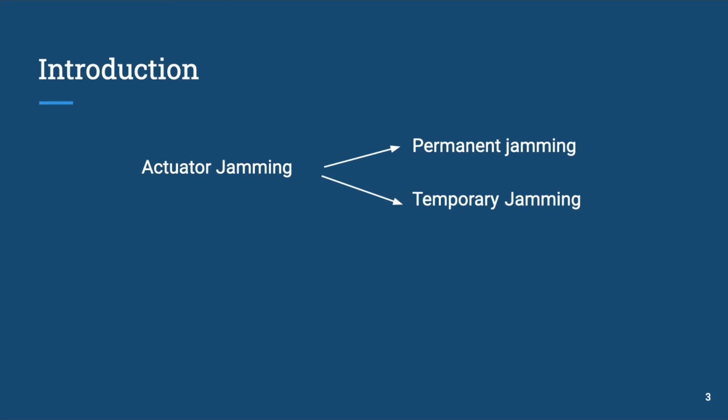In this presentation, we will be focusing on addressing aircraft actuator jamming. Actuator jamming is attributed to permanent jamming and temporary jamming, in which the fault phenomena could be very similar. Hence, a conventional fault detection module cannot discriminate between them. Therefore, we propose a reconfigurable model predictive controller with an active fault detection module to address this issue.

Have you ever wondered what is responsible for changing the pitch of airplanes? Elevators are surfaces of flight control, typically at the rear of an aircraft, used to control the pitch of the plane, the angle of attack, and the wing lift. The pitch of an aircraft is controlled by adjusting the angle, and therefore the lift force, of the elevator.

Lots of work have been done in the past to control the pitch of an aircraft for the purpose of flight stability. And yet this research still remains an open issue in present and future works.

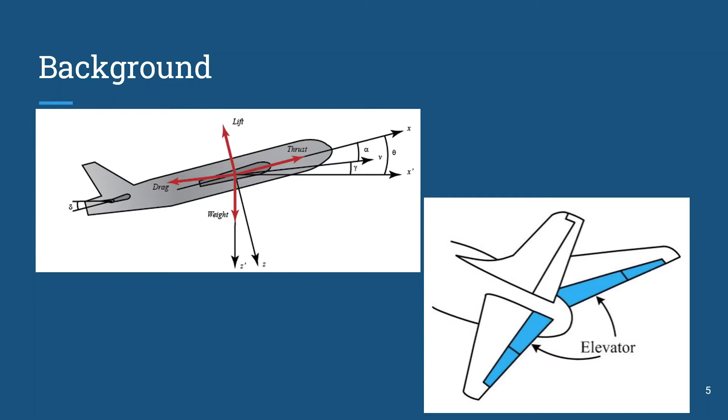So what is our motivation? In the past two decades, about 59% of fatal airliner aircraft accidents were caused by loss of control in flight. The malfunction or jam of aircraft control surfaces such as elevators is very dangerous because it results in a reduction of control authority and imposes persistent disturbances on the aircraft. The most critical actuation device is the longitudinal aircraft control, and its failures will result in a catastrophic aircraft crash.

In this presentation, we focus on the longitudinal control of an Airbus passenger aircraft in the presence of elevator jamming faults. We propose the use of Model Predictive Control, also known as MPC, as a fault-tolerant controller to actively help the fault detection unit discriminate between permanent and temporary jamming faults while ensuring the performance of the aircraft.

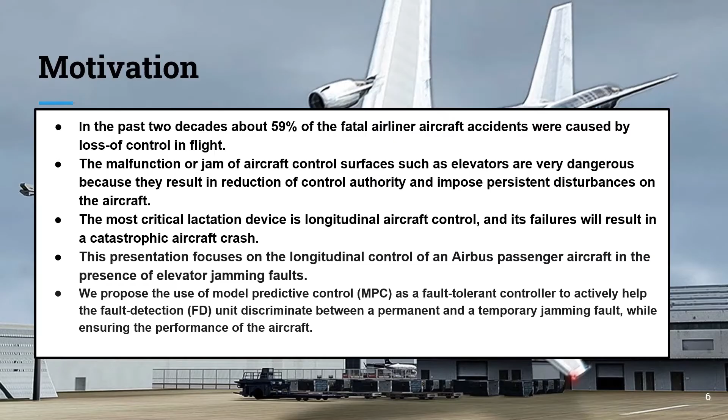Alright, let's dive into the more technical part of this presentation. I'll start off by explaining the mathematical representation of the aircraft longitudinal model.

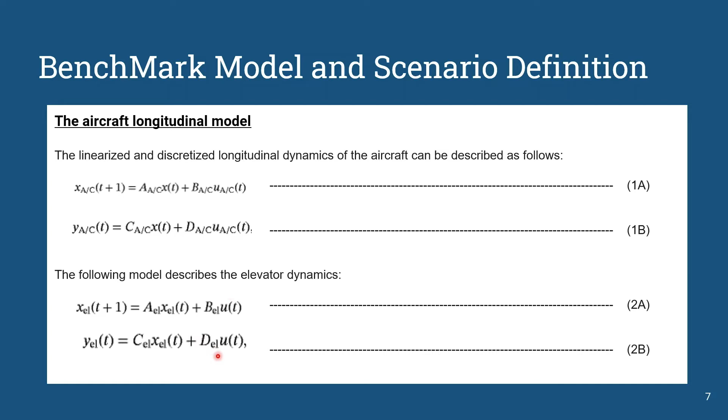This second equation stands for the discretized longitudinal dynamics of the aircraft, where y stands for the output and u is also the control input. As you can see, these other two equations basically mimic the first two.

Fault description: when elevators get jammed, one or more of them remains fixed at an unpredictable value. This might differ from their normal saturation limits. Elevator jamming can be attributed to two different root causes. The first one is known as the stuck fault, also known as permanent jamming.

Once the elevator gets stuck in a certain position, it remains in this position and cannot be recovered. From the graph, you can see this is where the jamming happened, this is where the fault started, and although this command was run, nothing happened. The elevator is still stuck in this position.

The second type of jamming is called the stall load, which is basically a temporary type of jamming. We can see that here the stall load started, and after this command is run, the elevator position is stuck for a certain time, and we reach the end of the stall load where it gets recovered.

Because of the similarities in these two jamming types, it's hard to predict if it's a stuck fault or a stall load. Hence, we propose our integrated fault-tolerant approach that actively modifies the control strategies to help the fault detector module discriminate between the two causes of the jamming.

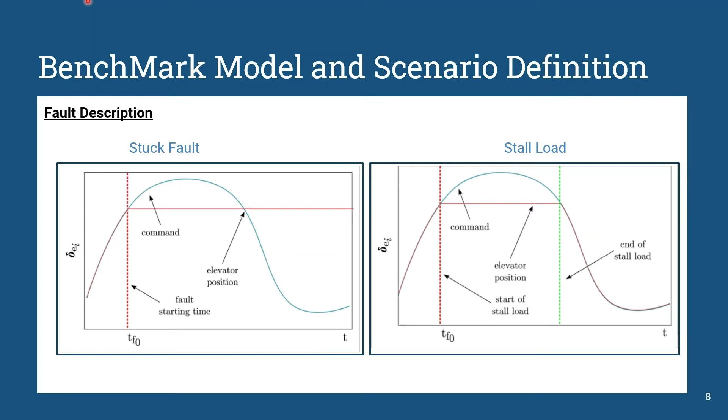The fault-tolerant control we are using is shown in the figure. In this diagram, we can see that the red box is the main component of the plant, and the green boxes are the main components of our fault-tolerant controller.

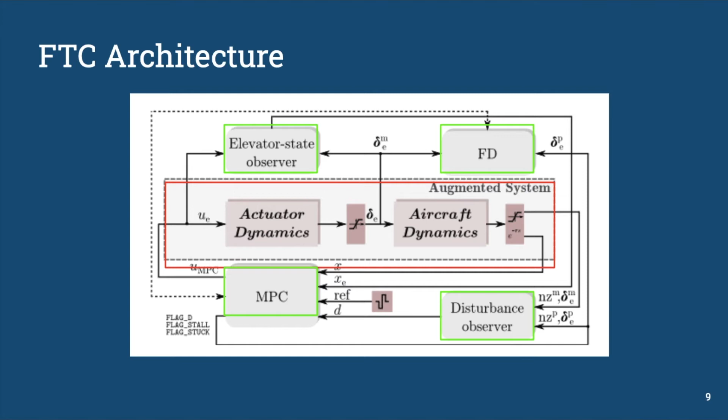Elevator state observer: as shown by the red line, we can see that the elevator state estimates are needed to exploit the elevator dynamics in the MPC formulation. On the other hand, the elevator state estimates are used to compute the predicted elevator outputs for the disturbance observer and FD module, which is shown by the yellow line.

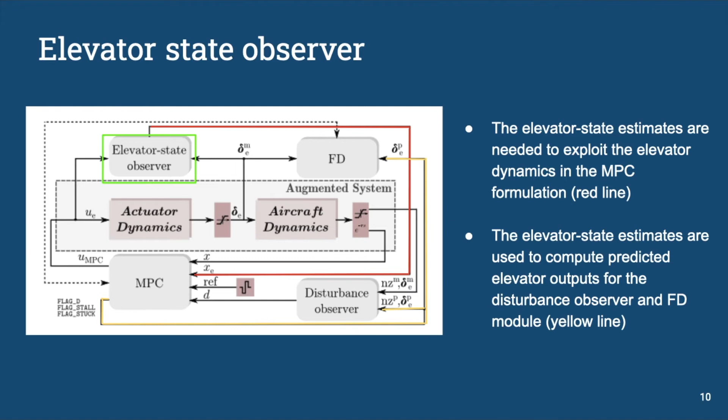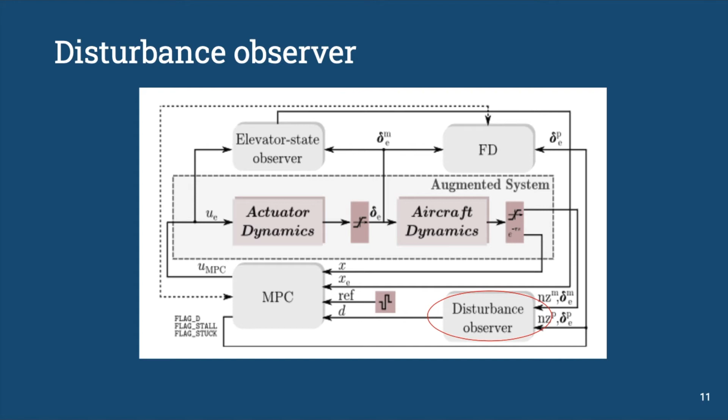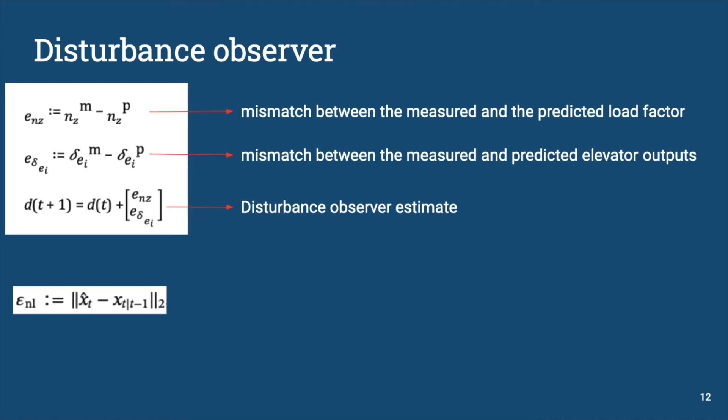The second module of the disturbance observer takes into account the plant model mismatch. We define an upper bound on these plant model mismatches, where x hat t is the measured state of the aircraft at time t, and xt is the value of the state at time t predicted by the measured state at t minus 1. This upper bound monitors the distance between the predicted behavior of the plant and the real behavior.

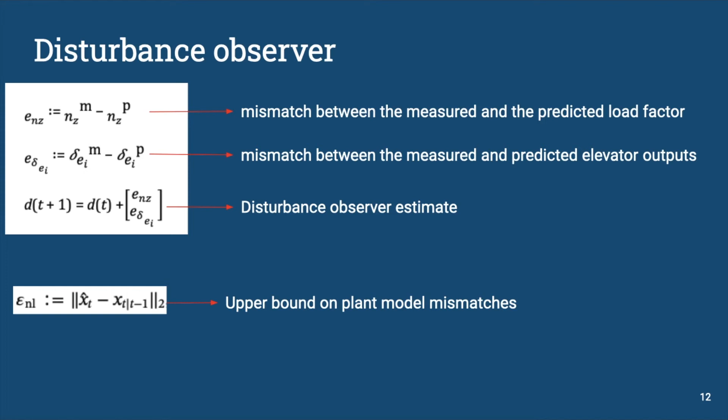If Ji is less than threshold, then the elevator i is fault-free. If Ji is greater than threshold, then the elevator i is jammed. The threshold value will be determined by the plant model mismatch of the elevator model after fixing the sliding window.

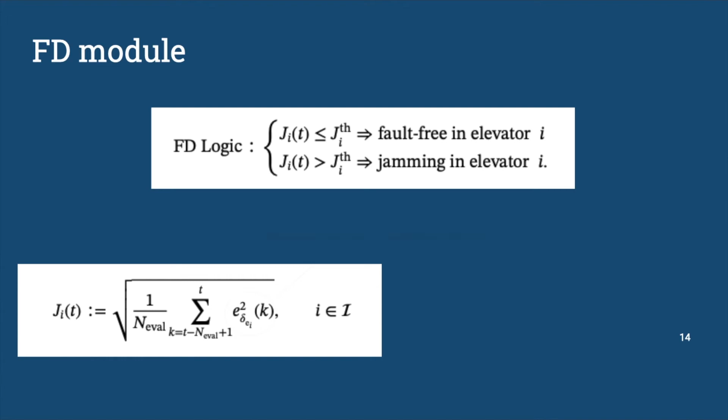K. Ji is determined by its root mean square over the sliding window K. It takes into account the elevator output predictor error and the slowest mode of actuator, which gives sufficient time to the physical system to register the jamming fault.

During the detection phase, the FD module constantly monitors each elevator. Once a fault is detected, the FD module sends a message to activate the first reconfiguration. The first reconfiguration is to help the FD module understand the root cause of the jamming fault.

The MPC will check if the upper or lower bound is at fault and modify it with a new bound. The new bound is indicated by the measured elevator position value at TF and a positive constant that is small enough to preserve the performance of the controller, but also large enough to allow the residual to exceed the predefined threshold. With the modified bound, we compare Ji with the threshold again.

If Ji is greater than threshold, this means the root cause is a stuck fault, since the elevator is unable to reach the tightened bound. If Ji is less than threshold within the diagnosed period, this means the root cause is a stall load, since the jammed elevator can still move within the reduced bound.

Once we diagnose the root cause of the jamming elevator, the FD module communicates with the MPC controller to activate the second reconfiguration.

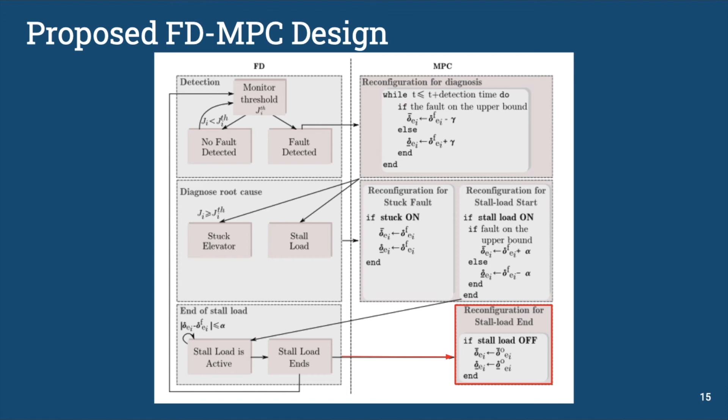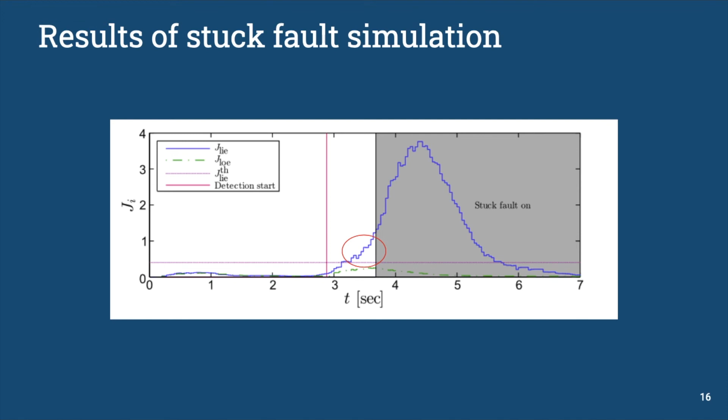In the case of a stuck fault simulation, we can see from the graph that by the end of the detection phase, the residual estimate, indicated by the blue curve, was still greater than the threshold. This indicates that this is a stuck fault. The MPC controller performs the reconfiguration for the stuck fault by updating the upper and lower bounds of the faulty elevators in the MPC problem formulation.

As for the stall load simulation, on the residual evaluation plot, we can see that it is at fault since it reaches the threshold. However, by the end of the detection phase, we can see that the residual value is within the threshold. This indicates that it is a stall load.

Even though the elevator is no longer stalled by the end of the detection phase, the FD unit does not immediately declare the end of the stall load, since the curve was still close to the lower bound, which is smaller than alpha. Once the curve moves away from the bound, the stall load ends and it restores back to its original bound.

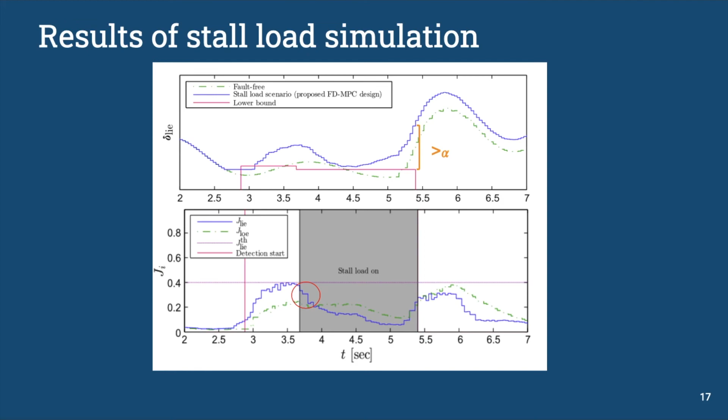Now the question for you is, do you think this system is completely reliable?

As you might have already noticed, the proposed algorithm relies on the interactions between the FD unit and the MPC controller. The success of this algorithm mainly depends on the accuracy of the detection and diagnosis. But what happens if one of these components fails? This may lead to misdetection in the FD unit or misdiagnosis of a stuck fault.

This misdetection can seriously affect the performance, especially if a stuck fault is being diagnosed, because now the algorithm starts to act like the elevator is stuck when it's in fact perfectly healthy.

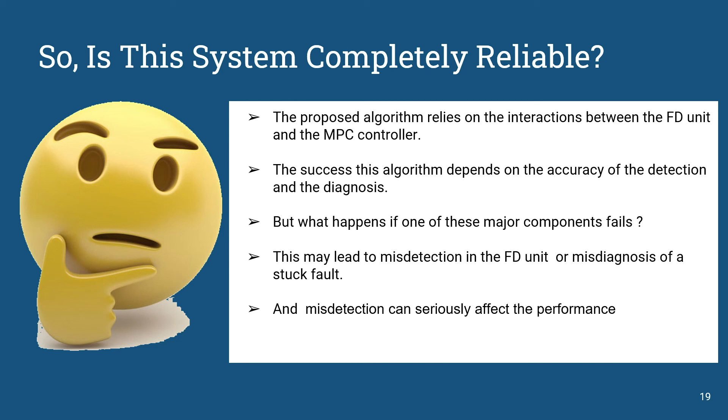An approach we were able to come up with to tackle the problem mentioned in the previous slide is hardware redundancy. Hardware redundancy is the most reliable way to increase the reliability of the system. Here, an identical component is installed in parallel to the main component, in this case the MPC and the FD, and the component performs the same function as the MPC or the FD.

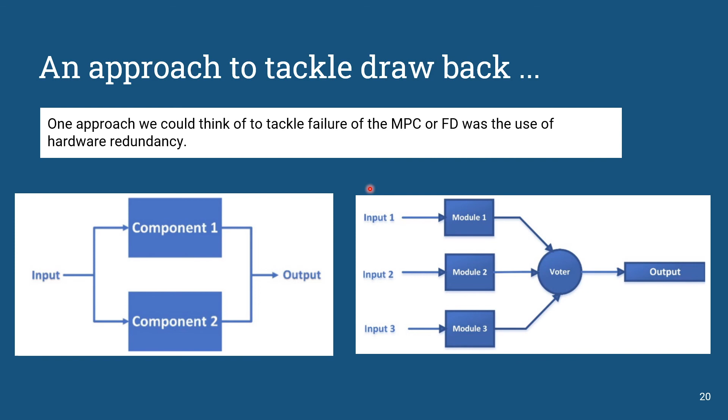In conclusion, we presented a novel fault-tolerant controller tailored to aerospace applications. Our approach relies on close interaction between a fault detector module and a model predictive controller. The FD module exploits the controller to diagnose the root cause of the elevator jamming, and the MPC exploits the information from the fault detector module to better predict and handle the jamming.

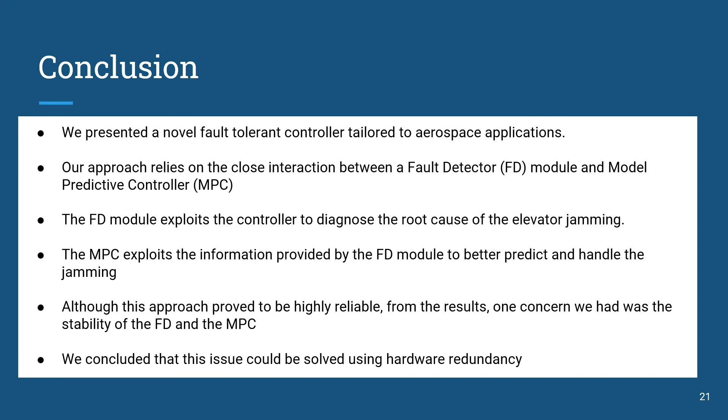Although this approach proved to be highly reliable from the results, one concern we had was the stability of the FD and the MPC. We concluded that this issue could be resolved using hardware redundancy.